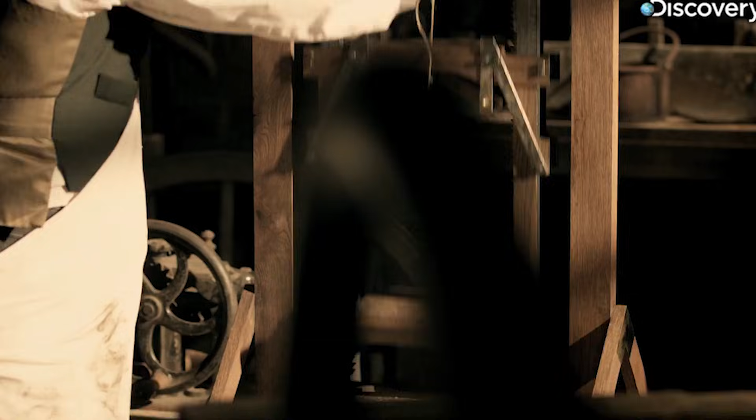May 23, 1854. Crystal Palace Exhibition Hall, Manhattan. The crowd of building developers and European-trained engineers gathered that afternoon would witness something that challenged everything they believed about vertical construction safety. Above them, a Vermont mechanic named Elisha Otis stood on a wooden platform, suspended 18 feet in the air by nothing more than hemp rope.

In New York's financial district, no building rose above 5 stories. Not because of engineering limits, but human ones. Deadly rope failures killed workers every month when industrial hoists snapped without warning. European engineering wisdom declared it impossible to build safely beyond 75 feet. American developers refused to risk their investments on unproven mechanical contraptions. The established truth seemed unshakable. Hemp rope breaks, people die, buildings stay low.

But Otis had designed something different, a spring-loaded safety mechanism that European experts dismissed as unreliable American novelty work. As hundreds of skeptical eyes watched from below, Otis raised his hand and gave the signal. His assistant lifted the axe. The rope that held him suspended above the crowd was about to be cut. What happened next would either prove the doubters right or change Manhattan's skyline forever.

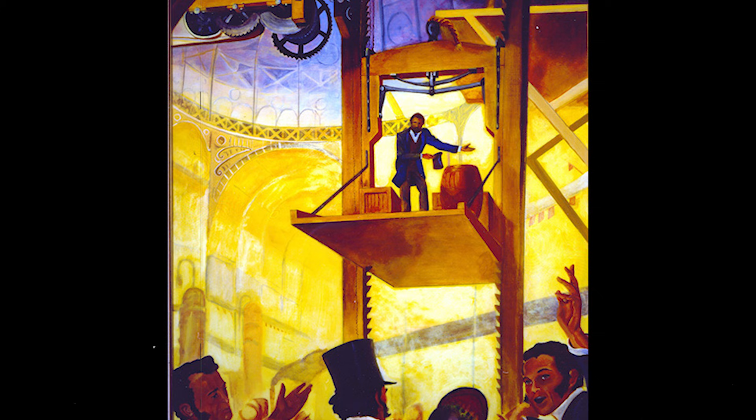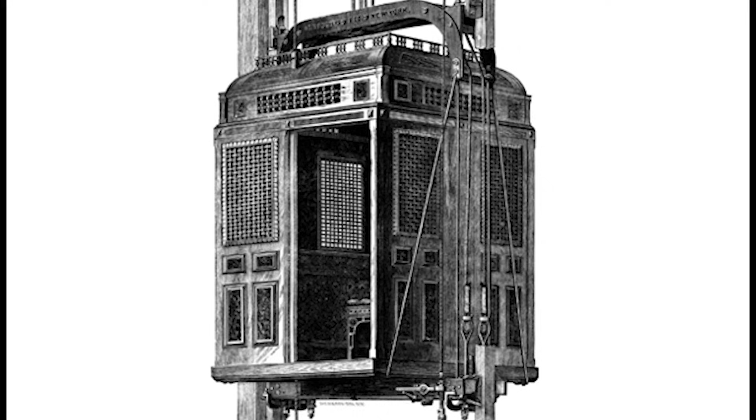The morning fog still clung to Manhattan's cobblestone streets in September 1852 when the construction foreman at the New Merchants Exchange building made his daily calculation. 5 stories, 75 feet from sidewalk to roofline. Beyond that height, he knew from bitter experience, the mathematics of human nature defeated the ambitions of architects. The upper floors of any building taller than 5 stories rented for half the price of ground-level space, not because of structural limitations, but because New York's business class refused to climb more than 75 stairs twice daily.

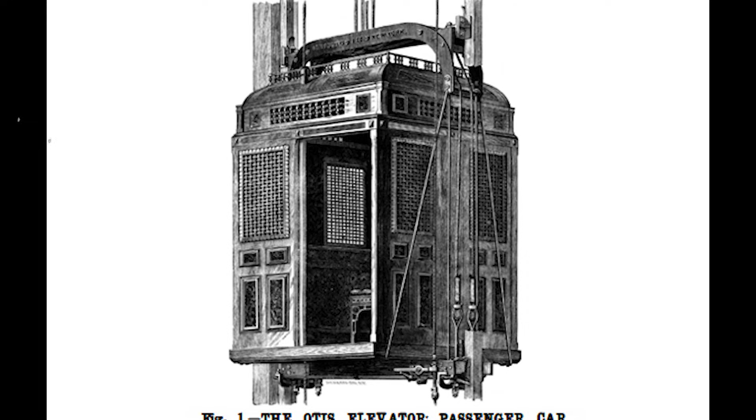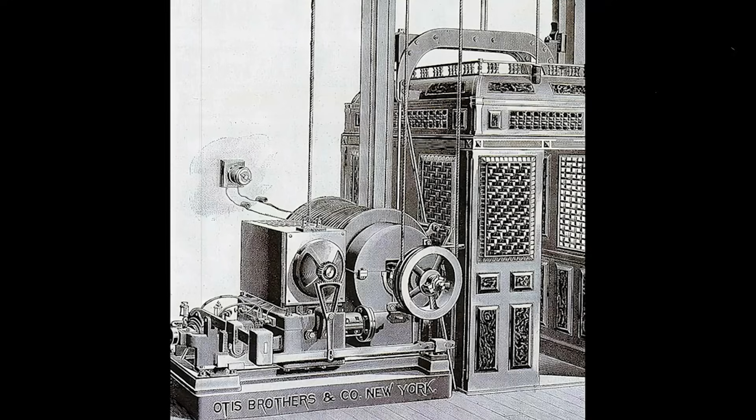The established wisdom ran deeper than mere convenience. European-trained engineers who had emigrated to New York's booming construction industry carried with them decades of calculated certainty about the vertical limits of commercial architecture. Johann Rapp, the Prussian-educated structural engineer overseeing the Exchange project, had studied under masters in Berlin who could recite the weight-bearing capacity of every known building material. Their conclusions were mathematically precise.

Beyond 5 stories, the economic equation collapsed. Rental income per square foot dropped by 50% while construction costs per floor increased by 30% due to the additional structural support required for height.

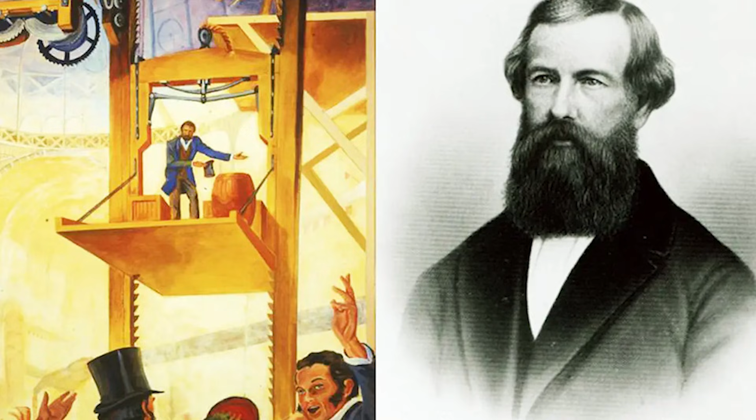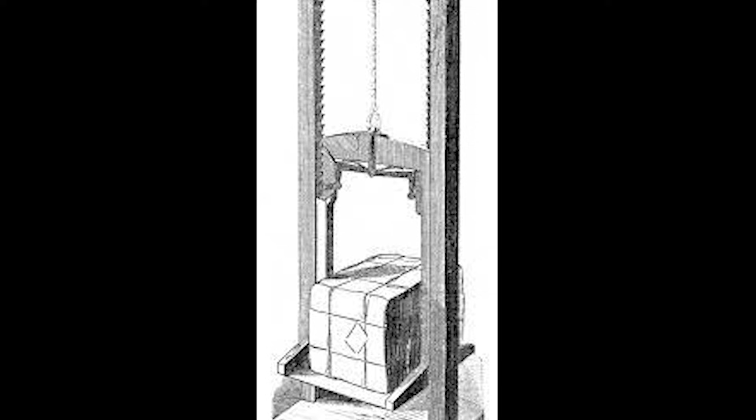The deadly reality behind these calculations lived in the industrial hoists that already served New York's warehouses and factories. Every construction site, every furniture manufacturer, every textile mill relied on rope and pulley systems to move heavy cargo between floors. Hemp rope, twisted from manila fiber and rated for specific weight loads, connected wooden platforms to steam-powered winches or manual capstans operated by teams of workers. The system functioned adequately for freight, but carried an accepted mortality rate that no responsible building owner would impose on paying tenants.

2 weeks earlier, the morning newspapers had reported another routine industrial death at the Haughwout Brothers Furniture Factory in Yonkers. The freight hoist's 3-inch hemp cable had parted without warning while carrying a load of mahogany bed frame components to the 3rd floor. The platform crashed down the shaft, killing both workers who had been guiding the cargo. The factory owner expressed appropriate regret and resumed operations the following day with a replacement rope rated for higher tensile strength. Such incidents occurred monthly throughout the Hudson River Industrial Corridor.

Hemp rope, regardless of diameter or fiber quality, eventually deteriorated under repeated stress loading. The breaking point was a matter of physics, not opinion.

Into this environment of calculated limitations stepped Elisha Graves Otis, a 41-year-old master mechanic whose entire professional life had been spent solving problems that other men accepted as permanent conditions. Born on a hardscrabble Vermont farm where broken equipment meant failed harvests, Otis had developed the engineer's fundamental mindset. Every mechanical system could be improved if you understood its failure points clearly enough. His formal education had ended at age 15, but 3 decades of repairing sawmill machinery, flour mill gear trains, and textile mill power transmission systems had taught him to see mechanical problems as puzzles waiting for systematic solutions.

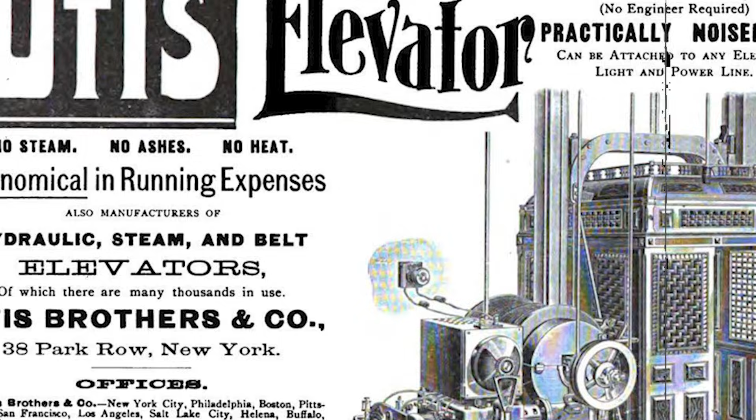Otis spent 3 weeks studying the mechanical principles behind rope failure before beginning his design work. Hemp fiber stretched under load, creating microscopic tears that accumulated over thousands of lifting cycles.

No visual inspection could detect the internal damage until the moment of catastrophic failure. The solution, Otis realized, required abandoning the assumption that rope strength was the critical safety factor. Instead, he would design a system that could function safely even after total rope failure.

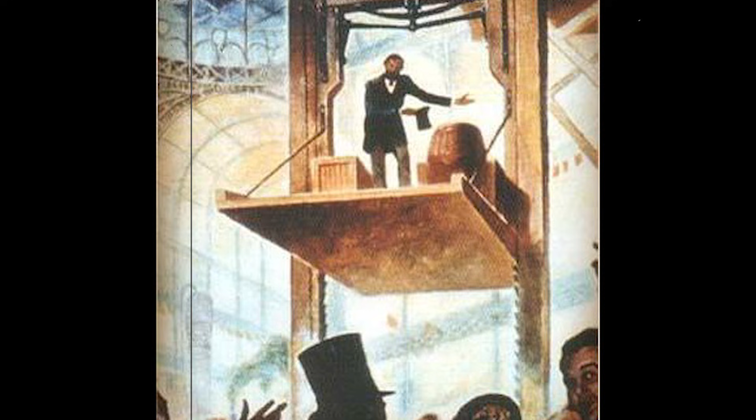The breakthrough concept emerged from his experience with railroad brake systems. Spring-loaded mechanisms could engage automatically when tension decreased beyond a predetermined threshold. Otis designed a tough steel wagon spring mechanism connected to spring-loaded pawls positioned alongside ratcheted guide rails. Under normal operation, rope tension kept the pawls retracted, allowing the platform to move freely up and down the shaft. If the rope broke, the sudden loss of tension would release the spring-loaded pawls, which would immediately wedge into the ratcheted rails and stop the platform's descent within inches.

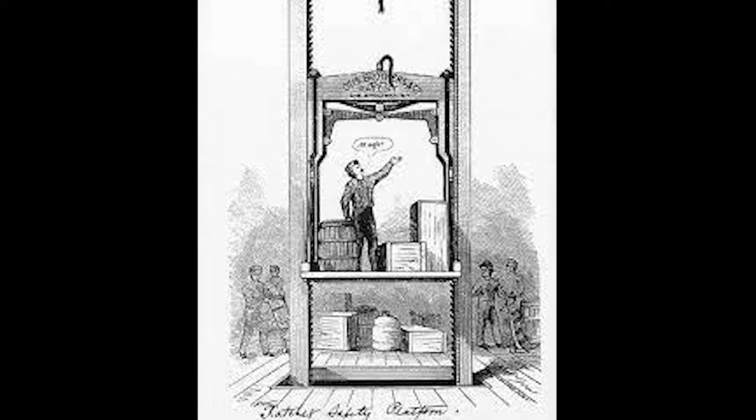The engineering specifications were precise and practical. Two U-shaped wagon springs, each rated for 2,000 pounds of tension load, connected through a lever system to spring-loaded pawls machined from tool steel. The guide rails featured 1-inch ratchet teeth cut at 45-degree angles into seasoned oak timber. The entire safety mechanism added exactly 18 pounds to the platform's weight and cost $100 to manufacture - double the price of a standard rope hoist, but a fraction of the cost of a single worker's death.

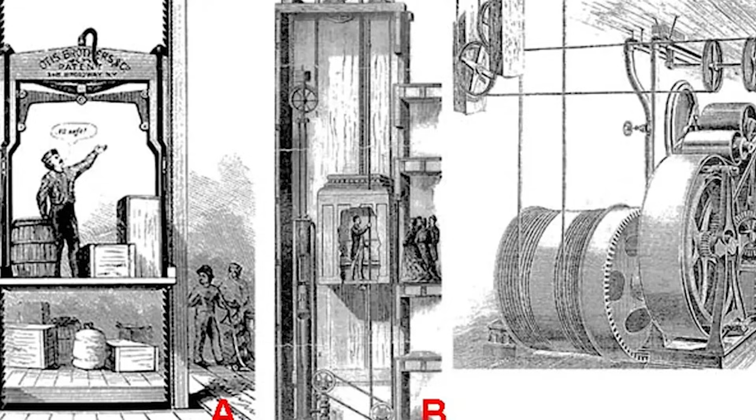By November 1852, Otis had installed his first safety hoist at the Maize & Burns factory. The device lifted 800-pound loads smoothly and quietly, with the safety mechanism completely invisible during normal operation. Factory workers, initially suspicious of any new machinery, quickly gained confidence as the system demonstrated its reliability through hundreds of lifting cycles without incident. Word of Otis's innovation spread through Yonkers' industrial community, but the initial market response proved disappointing.

Local factory owners praised the mechanical ingenuity while questioning the economic necessity. Standard hoists had served manufacturing adequately for decades. The occasional rope failure, while regrettable, represented an acceptable cost of industrial operations. Spending twice the price for an unproven safety mechanism seemed like unnecessary expense for a problem that claimed only 2 or 3 lives annually throughout the entire Hudson River corridor.

By September 1853, exactly one year after beginning his design work, Otis had completed and installed his first commercial safety elevator at the Crystal Palace Exhibition Planning Office in Manhattan. The installation demonstrated flawless mechanical performance, but generated zero sales inquiries from the thousands of visitors who observed the system during the exhibition's planning phase.

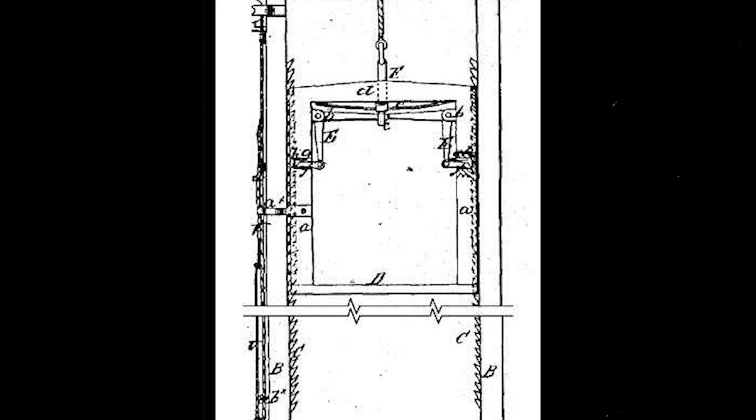New York developers dismissed the safety brake as mechanical trickery with no practical application to commercial construction. European-trained engineers published critical assessments describing the spring mechanism as unreliable American novelty work that violated established principles of mechanical engineering. The crushing reality of market rejection settled over Otis's workshop by early 1854, despite live demonstrations that proved the safety mechanism's effectiveness.

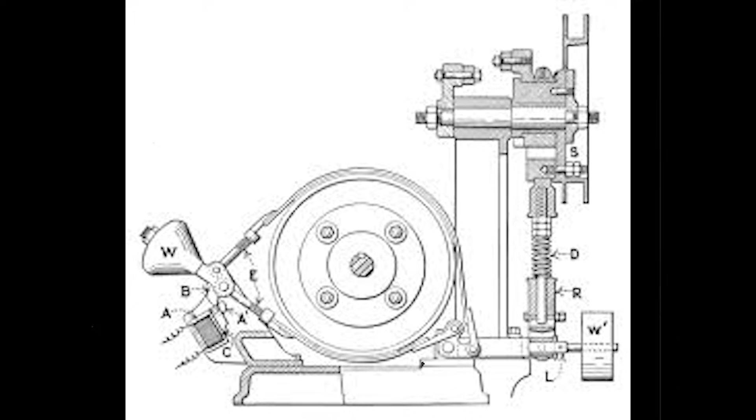Orders remained virtually non-existent. He had sold exactly 8 elevators, all for freight applications, none designed for human passengers. The vertical city of his imagination remained locked behind 5-story limitations, not because the technology was impossible, but because human psychology refused to trust American innovation over European engineering orthodoxy.

The financial crisis facing the Crystal Palace exhibition in early 1854 demanded theatrical solutions that conventional business wisdom could not provide. Phineas Taylor Barnum, newly appointed president of the Crystal Palace Association, inherited an enterprise bleeding money at a rate that would bankrupt the entire operation within 6 months. Daily attendance averaged fewer than 3,000 visitors, while the building's massive operating costs required at least 8,000 paying customers to break even.

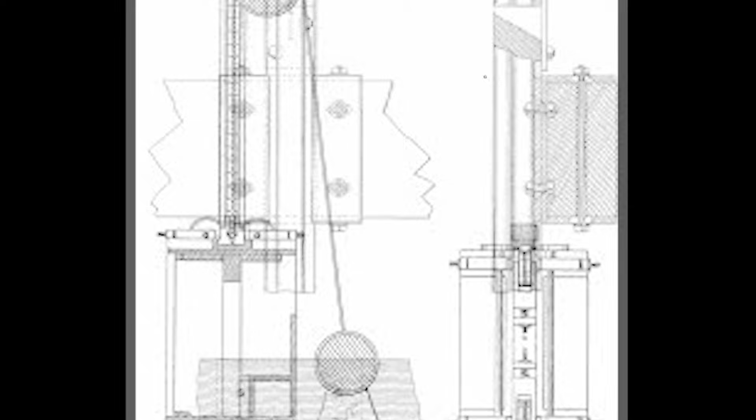European industrial exhibitions drew crowds through displays of established manufacturing prowess, but American audiences demanded spectacle, drama, and the promise of witnessing something genuinely unprecedented. Barnum understood that technical demonstrations succeeded or failed based on their ability to capture public imagination rather than engineering precision. His decades of experience managing circuses, museums, and traveling shows had taught him that crowds responded to moments of visible danger followed by dramatic resolution.

The key was creating genuine suspense about whether the performer would survive the demonstration, then delivering safety in a manner so conclusive that audiences would remember and retell the experience for years afterward.

The meeting between Barnum and Otis occurred in March 1854 at the Crystal Palace planning offices, where the inventor's safety hoist operated daily without attracting significant attention from visitors. Barnum observed the mechanism during routine cargo operations and immediately recognized its theatrical potential. The concept of a man deliberately severing his own life support system, then trusting an untested mechanical device to prevent his death, contained all the elements of compelling public spectacle.

More importantly, the demonstration would showcase American mechanical innovation in direct competition with European engineering traditions, creating a patriotic narrative that could draw crowds regardless of their technical understanding.

The practical arrangements required substantial modifications to Otis's existing equipment. The exhibition demonstration demanded a platform large enough for Otis to stand comfortably while remaining visible to spectators positioned throughout the Crystal Palace's main hall. The mechanism also needed to function reliably under theatrical conditions, where lighting, crowd noise, and performance pressure could affect the operator's precision. Barnum allocated prime exhibition space near the building's central dome, where natural lighting would illuminate the demonstration clearly and acoustic conditions would carry Otis's voice throughout the hall.

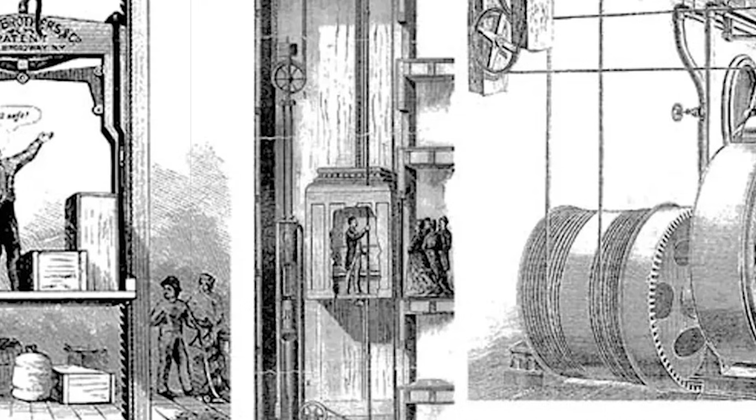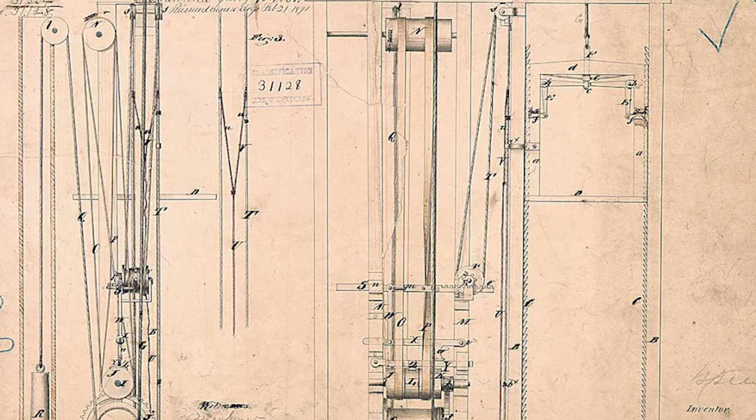The guide rails were machined from seasoned white oak and featured precisely cut ratchet teeth spaced at 1-inch intervals to ensure consistent engagement with the spring-loaded pawls. The safety mechanism itself required no modifications from Otis's standard industrial design, but the demonstration setup needed additional engineering considerations. The suspension rope was positioned to snap cleanly when severed by an axe blow, eliminating any possibility of partial failure that might compromise the dramatic effect. The spring-loaded pawls were adjusted to engage within exactly 4 inches of rope failure, providing sufficient drop distance to demonstrate genuine free fall while minimizing the mechanical shock when the safety brake activated.

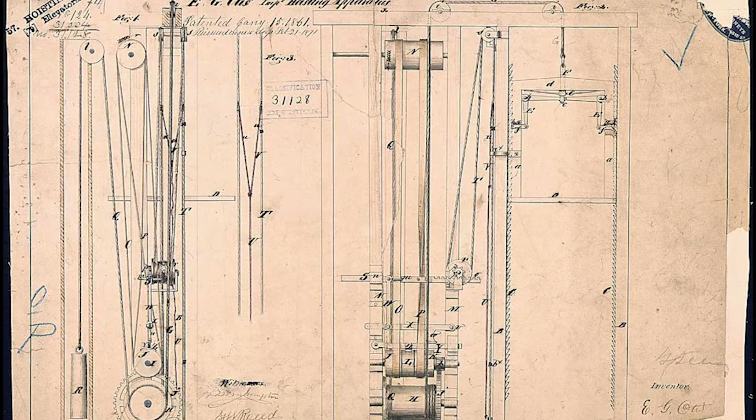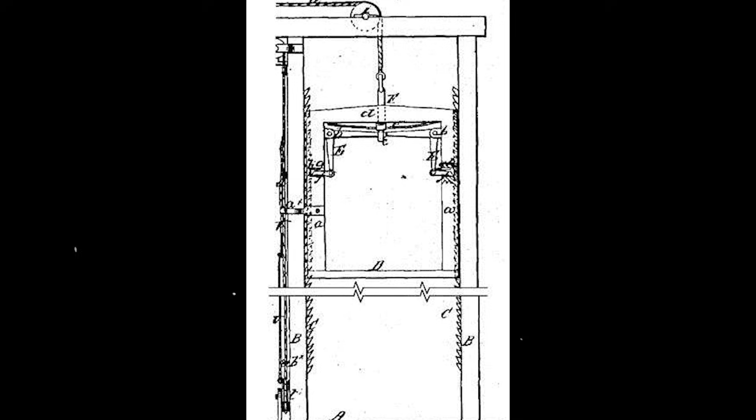The weeks preceding the demonstration generated considerable advance publicity through newspaper advertisements and word-of-mouth promotion among New York's business community. Barnum's promotional materials emphasized the life-or-death stakes of the performance, describing Otis as a daring American inventor who would risk his life to prove the superiority of Yankee mechanical ingenuity over European engineering traditions. The marketing campaign specifically targeted building developers, factory owners, and construction industry professionals, whose skepticism about elevator safety represented the primary obstacle to commercial adoption.

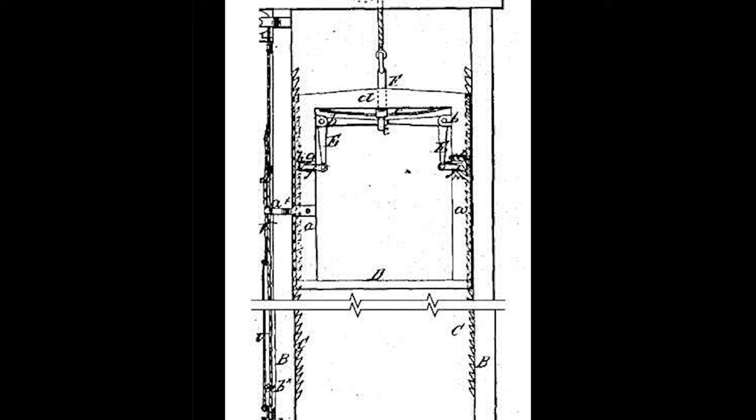Public interest exceeded Barnum's expectations as the demonstration date approached. Advance ticket sales indicated attendance would approach the Crystal Palace's maximum capacity of 12,000 visitors. Newspaper reporters from the Tribune, Herald, and Times requested exclusive interviews with Otis before the performance. Several European engineering consultants working on Manhattan construction projects announced their intention to attend, creating an international dimension to what had begun as a simple product demonstration.

The morning of May 23, 1854, arrived with unseasonably warm weather that filled the Crystal Palace's iron and glass structure with bright sunlight and oppressive humidity. Spectators began gathering around the demonstration area 3 hours before the scheduled performance, with the most prominent positions occupied by well-dressed building developers and formally attired European engineers who viewed the proceedings with obvious skepticism. Working-class factory owners and construction foremen filled the remaining space, their practical experience with industrial hoists providing them with intimate knowledge of exactly how catastrophic rope failures typically concluded.

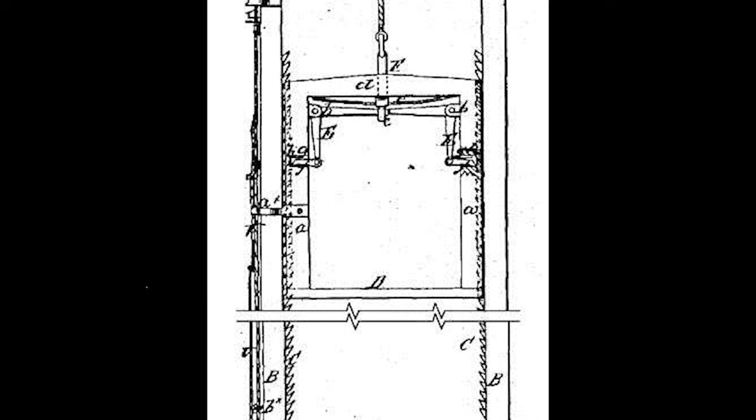Otis appeared at the demonstration site wearing his standard work clothes rather than theatrical costume, a deliberate choice that emphasized his identity as a practicing mechanic rather than a professional entertainer. His assistants had positioned the necessary tools and equipment with theatrical precision, including the sharp-bladed axe that would sever the suspension rope and trigger the safety mechanism.

The crowd's conversation gradually diminished as Otis began his ascent to the platform, the silence reflecting genuine uncertainty about whether they were about to witness a successful demonstration or a public death. The platform rose smoothly to its full 18-foot height, carrying Otis well above the heads of the assembled spectators. From that elevation, his voice carried clearly throughout the hall as he began explaining the mechanical principles behind his safety brake system. The technical details were deliberately simplified for the mixed audience, but he emphasized the fundamental engineering challenge, creating a mechanism that could prevent catastrophic failure even when the primary load-bearing component failed completely.

The demonstration reached its climactic moment when Otis raised his hand and called for silence throughout the hall. 12,000 spectators held their collective breath as his assistant positioned the axe blade against the hemp rope that represented the sole barrier between the inventor and a potentially fatal fall. The next few seconds would either validate years of engineering work and design refinement or destroy forever the credibility of American mechanical innovation in the elevator industry.

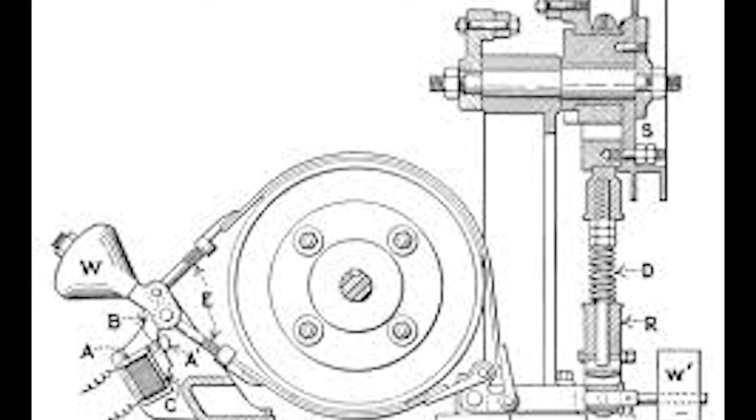The immediate aftermath of the Crystal Palace demonstration generated newspaper coverage that reached every major city from Boston to Charleston, but commercial orders arrived with frustrating deliberation. Throughout the remainder of 1854, Otis received inquiries from factory owners and warehouse operators who had witnessed the rope-cutting spectacle, yet most conversations concluded with polite expressions of interest rather than binding contracts. By December, total sales reached 8 elevators, generating revenue of $1,200 against manufacturing and demonstration costs exceeding $2,000. The gap between public acclaim and commercial adoption revealed the persistent divide between theatrical success and business confidence.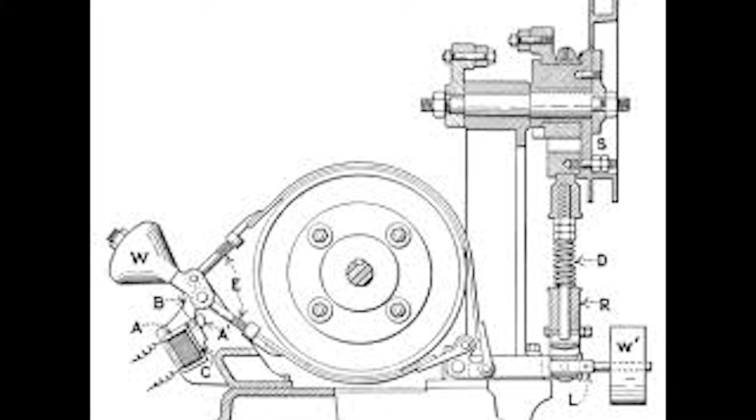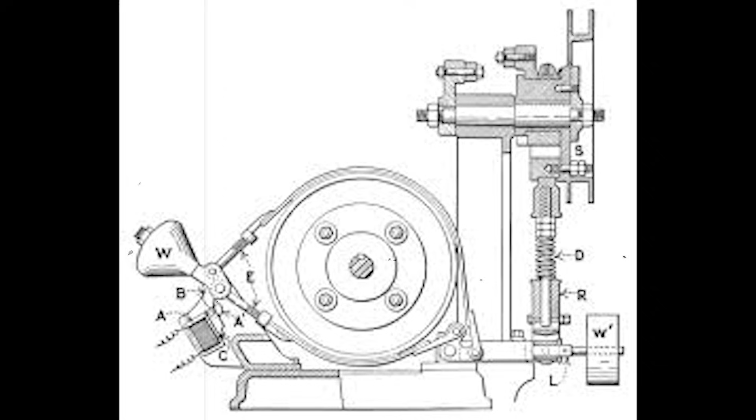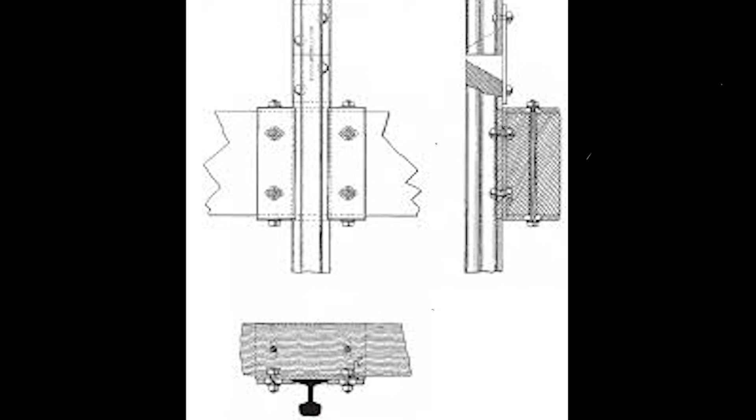The fundamental obstacle remained psychological rather than technical. Building developers and factory owners praised Otis's mechanical ingenuity while questioning whether the safety mechanism would function reliably under daily operational conditions. The Crystal Palace demonstration had proven the concept under controlled circumstances, but industrial applications involved thousands of lifting cycles, varying load weights, and operational stresses that could not be replicated in a single theatrical performance. European engineering consultants continued publishing technical critiques that questioned whether American spring steel could maintain consistent tension over extended periods of use.

Throughout 1855, Otis methodically addressed these concerns through incremental design improvements and expanded field testing. He installed demonstration elevators at 3 additional manufacturing facilities, accumulating operational data that documented mechanical performance across varying conditions. The results supported his engineering confidence. After 6 months of daily use, the safety mechanisms showed no signs of spring fatigue or pawl wear that would compromise their effectiveness. The ratcheted guide rails maintained precise engagement angles despite repeated activation cycles during routine maintenance testing.

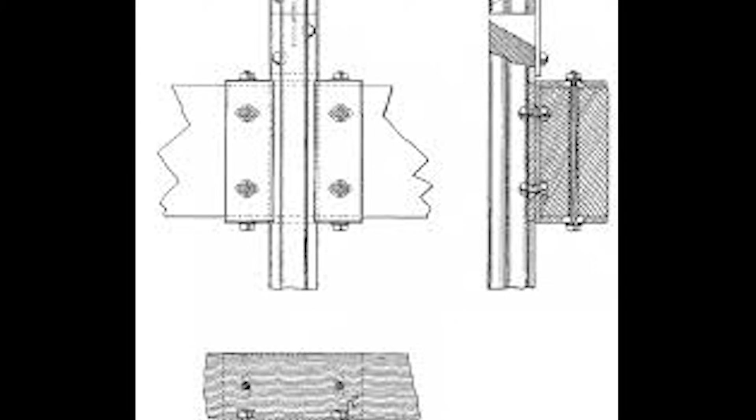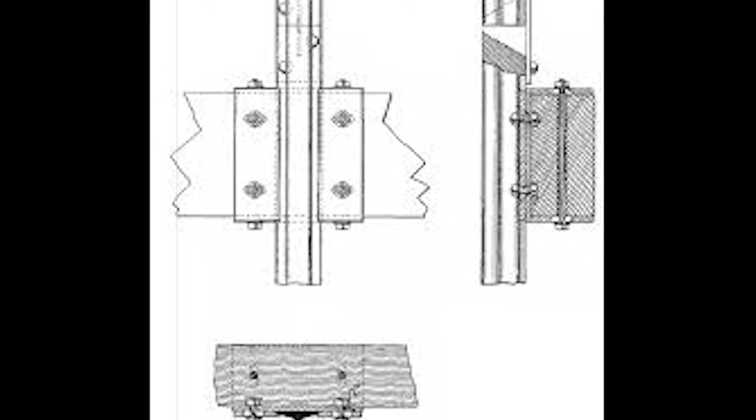The commercial breakthrough began with an unexpected inquiry from Eder Haughwout, owner of Manhattan's most prestigious china and glassware emporium on Broadway. Haughwout had observed the Crystal Palace demonstration with the calculating eye of a luxury retailer who understood that his wealthiest customers expected both elegance and convenience. His 5-story building at the corner of Broadway and Broome Street served clientele that included Mary Todd Lincoln, prominent banking families, and European diplomatic representatives who demanded the finest imported merchandise displayed in appropriately refined surroundings.

The challenge Haughwout presented transcended the industrial applications that had defined Otis's previous work. A passenger elevator serving luxury retail customers required engineering specifications that prioritized smooth operation, quiet performance, and absolute safety over the heavy lifting capacity needed for freight applications. The mechanism would carry well-dressed ladies in elaborate gowns, elderly gentlemen with walking sticks, and foreign visitors whose comfort and safety would directly impact the store's reputation among New York's social elite.

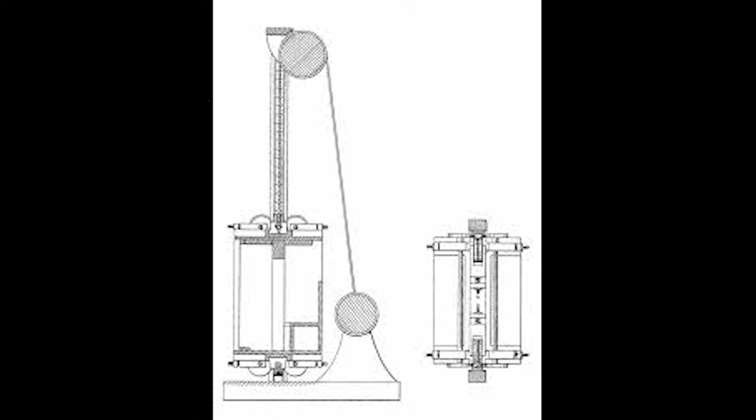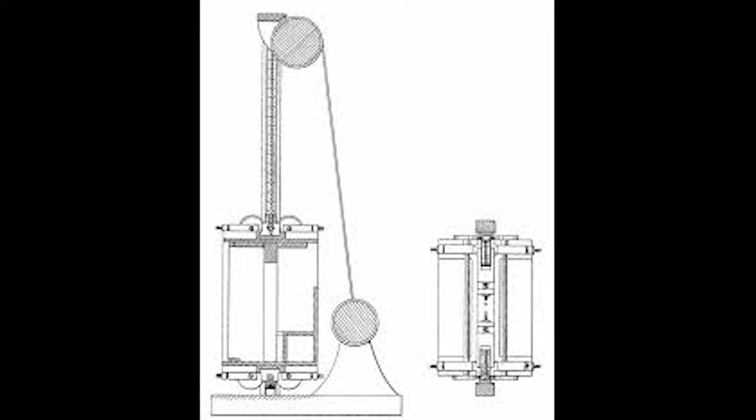Otis spent the winter months of 1856 developing passenger elevator specifications that addressed these refined requirements. The platform dimensions expanded to accommodate multiple passengers wearing the voluminous clothing styles of the period. The guide rail system was redesigned to eliminate the mechanical noise that characterized industrial hoists, incorporating felt padding and precision machining that reduced operational sound to levels appropriate for a luxury retail environment. The safety mechanism retained its core spring and pawl design while adding refinements that ensured smooth engagement without the jarring impact that freight elevators could tolerate.

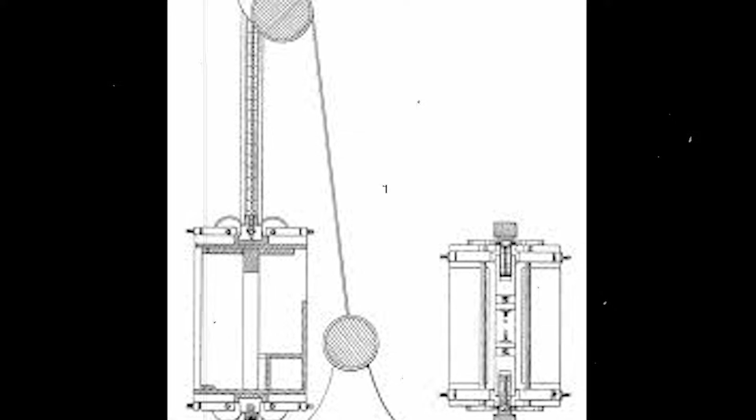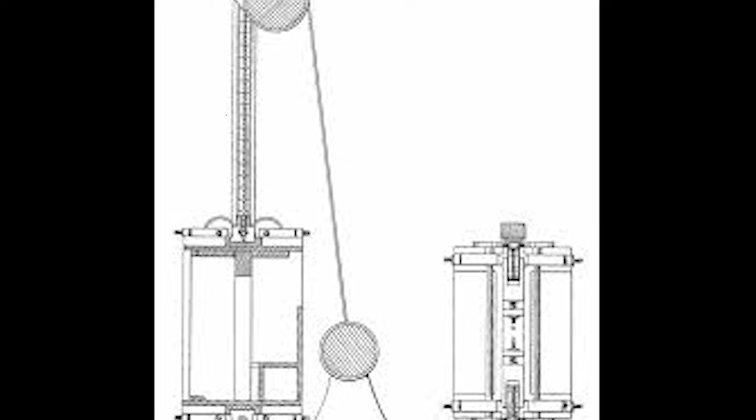The most significant innovation involved the power system. Industrial elevators relied on manual operation or steam engines that generated considerable noise and vibration. Haughwout's passenger application required a steam-powered hydraulic system that could provide smooth acceleration and deceleration while maintaining the quiet operation necessary for an elegant shopping experience. The hydraulic mechanism used steam pressure to drive a piston that lifted the elevator car through a system of pulleys and counterweights, with the safety brake serving as backup protection against cable failure.

Construction began in January 1857, with installation scheduled for completion before the spring shopping season. The engineering specifications reflected the luxury application. The elevator car featured upholstered seating for 6 passengers, polished brass fittings, and mahogany wood paneling that matched the store's interior decor. The operational parameters included a maximum ascent speed of 40 feet per minute, approximately 15 seconds travel time between floors, and a total capacity of 1,000 pounds, including passengers and operator.

The installation process attracted considerable attention from Manhattan's business community, as the Haughwout Building would house the world's first commercial passenger safety elevator. Skeptical observers gathered daily to watch construction progress, with particular attention focused on the safety mechanism installation. European engineering consultants published advanced critiques predicting that passengers would refuse to trust their lives to an untested American contraption, regardless of theatrical demonstrations or mechanical specifications.

March 23, 1857 marked the elevator's first operational day, with Haughwout personally conducting initial test rides before opening the system to customers. The New York Tribune reported the event with barely concealed amusement.

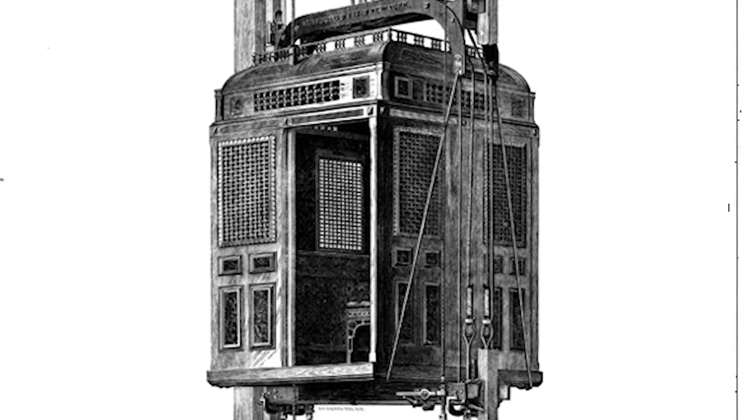Despite these obstacles, daily elevator usage gradually increased as customers gained confidence through repeated successful operations. The mechanism's smooth performance and obvious safety features slowly overcame initial reluctance, particularly among elderly customers who appreciated avoiding the physical exertion of climbing multiple flights of stairs while carrying purchases.

The elevator's novelty also attracted curious visitors who rode the system specifically to experience this unprecedented form of mechanical transportation. By summer 1857, the Haughwout elevator had achieved routine operational status, carrying dozens of passengers daily without incident.

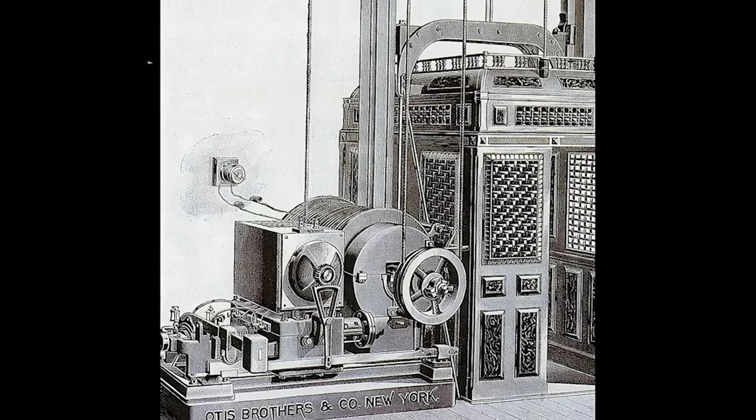The success generated inquiries from other luxury retailers and commercial building developers who recognized the competitive advantage that passenger elevators could provide in attracting customers and tenants. More importantly, the installation had proven that American elevator technology could function reliably in applications that demanded absolute safety and refined performance standards that exceeded industrial requirements.

The winter of 1860 to 1861 brought an unusually harsh diphtheria epidemic to the Hudson River Valley, claiming victims across all social classes with democratic ruthlessness. Elisha Otis, whose chronic health problems had plagued him throughout his adult life, contracted the disease in late March and died on April 8, 1861, at age 49.

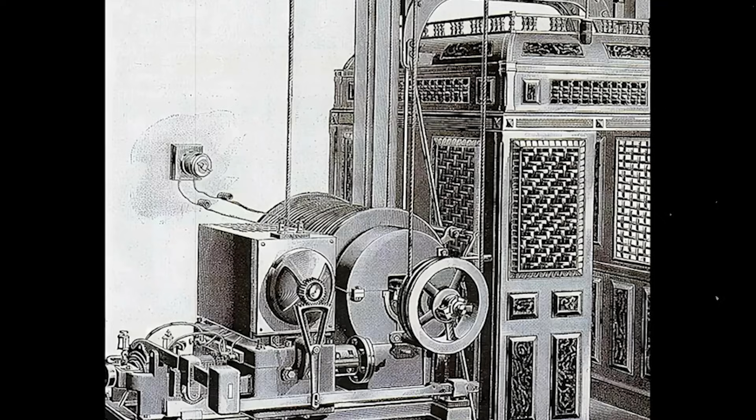His death occurred just 4 months after receiving patent number 31,128 for his safety brake mechanism, the legal recognition he had pursued for nearly a decade. The timing seemed cruelly ironic. Recognition arrived precisely when the inventor could no longer benefit from the commercial success that had eluded him for so long.

The Otis Elevator Company passed immediately to his two sons, Charles and Norton, who inherited an enterprise with 25 operational elevators scattered throughout Manhattan and Brooklyn, outstanding debts exceeding $3,000, and a manufacturing operation that employed fewer than a dozen workers. The brothers possessed business acumen that their father had lacked, but they faced immediate challenges that threatened to destroy the company before they could establish stable operations.

The outbreak of civil war in April 1861 disrupted construction activity throughout New York, as building developers postponed major projects indefinitely, and existing elevator customers questioned whether mechanical systems represented wise investments during uncertain economic times.

Charles Otis, the elder son at 26, had worked closely with his father during the final years, and understood both the technical principles behind elevator design and the commercial obstacles that had limited market acceptance. Norton, 5 years younger, brought systematic organizational skills that complemented his brother's mechanical knowledge.

Together, they recognized that sustaining their father's innovation required transforming a craftsman's workshop into a manufacturing business capable of producing standardized elevators at prices that could compete with European imports while maintaining the safety standards that distinguished American designs.

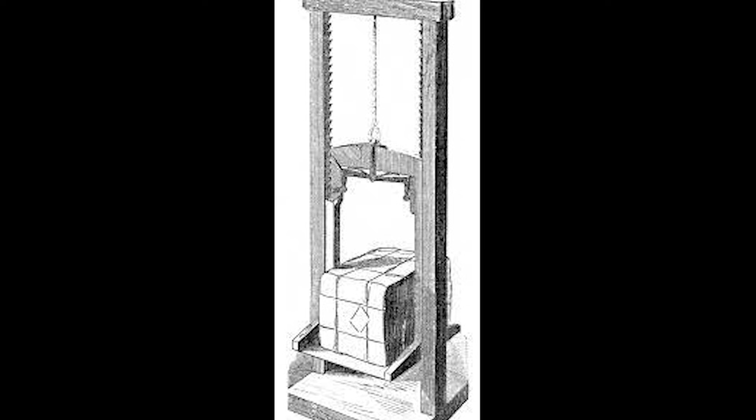Several competitors had entered the elevator market, offering cheaper systems that eliminated safety mechanisms in favor of lower prices and simpler installation requirements. European engineering firms established American offices and promoted traditional rope and pulley systems that claimed superior reliability through time-tested design principles rather than unproven mechanical innovations. The most serious challenge emerged from changing construction economics during the war years.

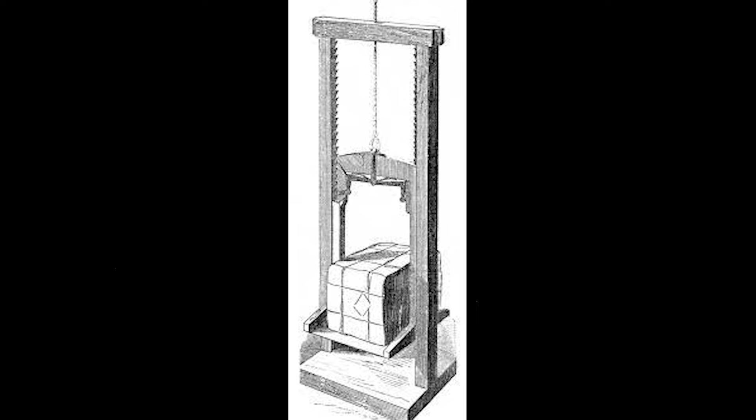Manhattan real estate prices, which had driven demand for vertical building solutions during the 1850s, stagnated as business activity shifted toward military contracts and war-related manufacturing. The economic incentive for constructing tall buildings disappeared when ground floor space could accommodate most commercial requirements at stable rental rates. Building developers who had previously considered elevator installations as competitive advantages now viewed them as unnecessary expenses that reduced profitability without providing corresponding benefits.

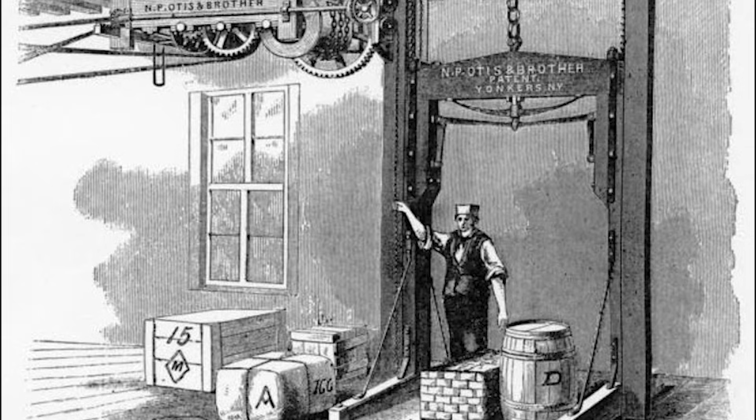The Panic of 1873 delivered the decisive blow to elevator market expansion that had been building throughout the post-war Reconstruction period. The financial collapse, triggered by railroad overspeculation and European investment withdrawals, created a depression that lasted until 1879 and virtually eliminated new construction activity throughout American cities. Manhattan building permits, which had averaged over 800 annually during the pre-war boom, fell to fewer than 200 per year during the worst Depression years.

The psychological impact of economic collapse extended the market contraction beyond rational financial calculations. Building developers who had survived the panic became extraordinarily risk-averse, avoiding any innovations that could not demonstrate immediate and substantial returns on investment. Elevator installations, which required significant upfront capital and ongoing maintenance costs, represented exactly the type of speculative expense that Depression-era business owners eliminated first.

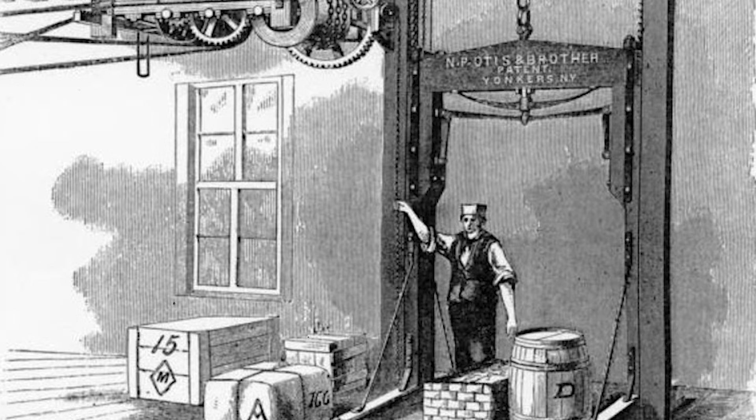The safety benefits that had gradually won acceptance during the 1860s seemed irrelevant when building heights remained limited to traditional five-story maximums that required no mechanical assistance for vertical transportation. Several prominent Manhattan buildings actually removed their elevators during the mid-1870s to reduce operational expenses and eliminate maintenance costs that could not be justified by rental income from upper floors.

The Tribune Building, Western Union Building, and Equitable Building stood as isolated exceptions to the five-story limitation. But even these structures faced financial pressures that questioned the economic viability of vertical construction in American cities.

European engineering publications seized upon the American elevator industry's struggles as validation of their long-standing skepticism about mechanical solutions to architectural challenges. Technical journals published detailed analyses proving that tall buildings could never achieve economic viability in American business conditions, citing operational costs, safety concerns, and tenant psychology as insurmountable obstacles to vertical urban development. The mechanical ingenuity that Americans had celebrated during the Crystal Palace demonstration now appeared as misguided innovation that violated fundamental principles of sound construction practice.

By 1875, only scattered tall buildings existed in Manhattan, and critics confidently declared the elevator a passing fancy, unsuited to American commercial requirements. The vertical city that Elisha Otis had envisioned seemed like an impossible dream, defeated not by technical limitations but by economic reality and human psychology. His sons maintained the company through custom installations and industrial applications, but the transformative potential of passenger elevators appeared permanently constrained by forces beyond mechanical engineering solutions.

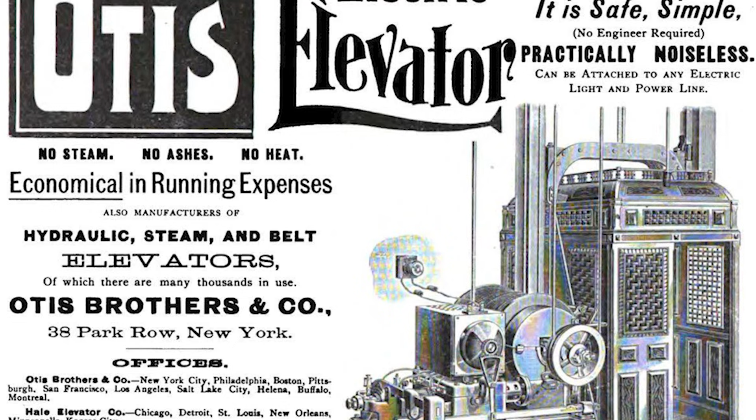Rather than purchasing additional expensive Manhattan real estate, Equitable's directors chose to add four floors to their existing building, creating the first 12-story office structure in American commercial history. The expansion required multiple passenger elevators capable of transporting hundreds of office workers daily between floors that extended far beyond the reasonable limits of stair-climbing convenience.

The engineering specifications for the Equitable installation represented the most ambitious elevator project yet attempted in American construction. Six passenger elevators, each with a capacity of 1,500 pounds, would serve 12 floors with travel speeds of 120 feet per minute, three times faster than the Haughwout store's pioneering system. The safety mechanisms incorporated all of Charles Otis's design refinements, including dual spring systems, reinforced guide rails with precision-cut ratchet teeth, and emergency stop controls activated by passengers in case of mechanical problems.

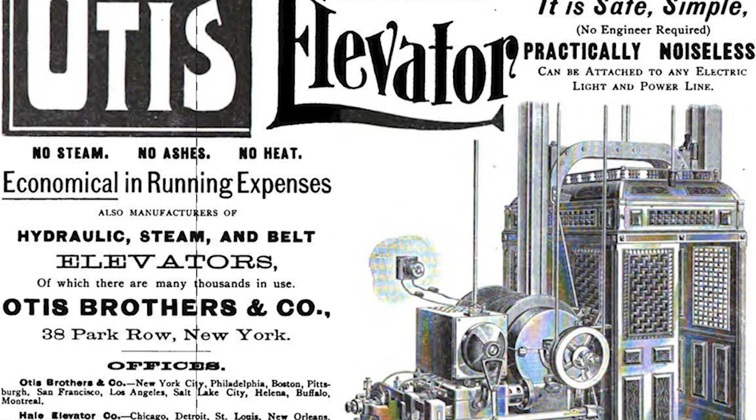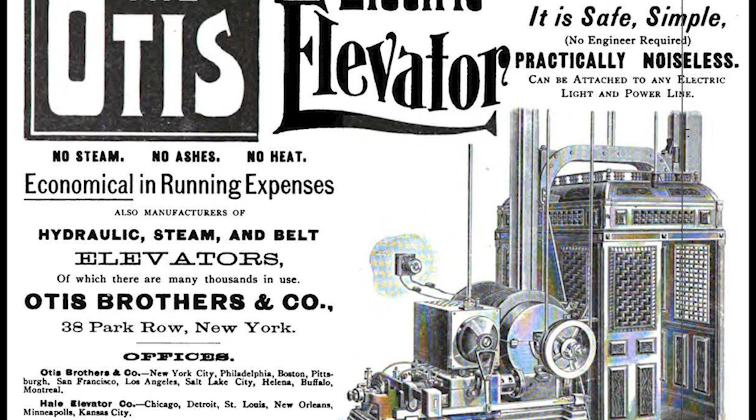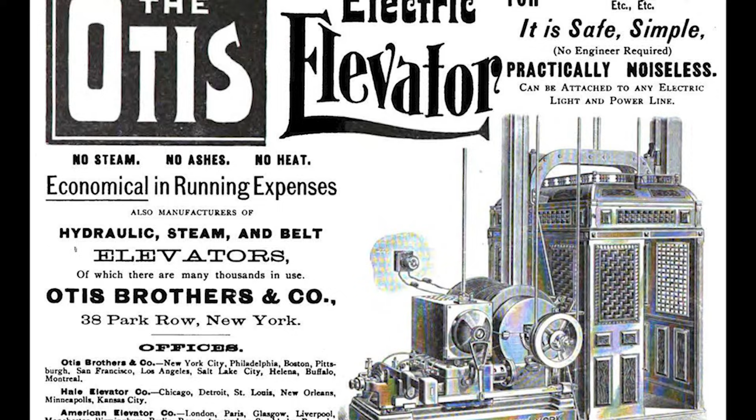The installation process required six months of construction work that attracted daily observation from Manhattan's architectural and engineering communities. European consultants who had confidently predicted the failure of American vertical construction during the Depression years now watched with grudging interest as Otis elevators demonstrated capabilities exceeding their theoretical calculations about passenger psychology and mechanical reliability. The smooth, quiet operation of the hydraulic drive systems eliminated most of the noise and vibration that had characterized earlier elevator designs, while the safety mechanisms provided visible reassurance that addressed lingering public concerns about rope failure.

The commercial success of the completed Equitable building exceeded all projections and fundamentally altered Manhattan real estate economics. Upper floors, which had traditionally rented for half the price of ground-level space, now commanded premium rates of $4 per square foot compared to $2.50 for street-level offices. The reasons were immediately apparent to tenants: better views of New York Harbor and the Hudson River, cleaner air above the dust and noise of street traffic, and greater privacy from the commercial bustle that characterized ground-floor spaces.

The psychological transformation of Manhattan's business community occurred with startling rapidity once the Equitable building proved the economic viability of vertical construction. Building developers who had avoided elevator installations for two decades suddenly competed to secure Otis contracts for new construction projects. The company's order backlog extended beyond their production capacity by early 1881, requiring expansion of manufacturing facilities and workforce to meet demand that had materialized seemingly overnight.

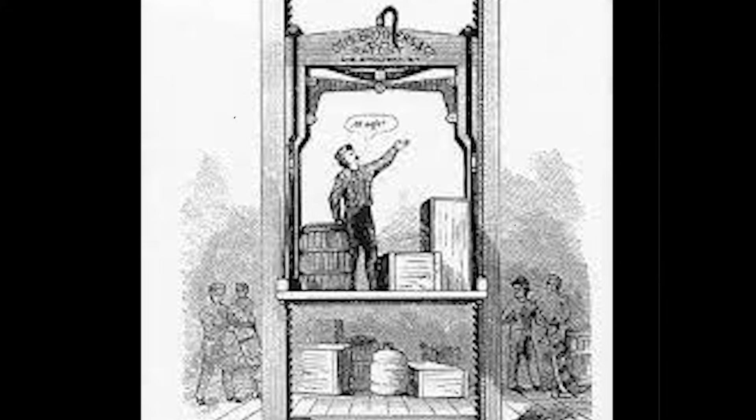The architectural implications extended far beyond individual building projects to encompass fundamental changes in Manhattan's urban landscape. Trinity Church, which had dominated the city's skyline at 280 feet since 1846, suddenly appeared dwarfed by the Tribune Building's 260 feet and the Western Union Building's 230 feet. The psychological impact was profound. For the first time in New York's history, commercial architecture challenged religious structures for visual prominence in the urban environment.

The engineering achievements that made these heights possible reflected continuous refinements to Otis's original safety brake concept. The spring-loaded pawl mechanism remained fundamentally unchanged, but manufacturing precision had improved dramatically through machine tools that could cut ratchet teeth to tolerances measured in thousandths of an inch. The guide rail systems now utilized steel rather than wood, providing greater durability and more consistent engagement with the safety mechanisms. Steam-powered hydraulic systems had been refined to deliver smooth acceleration and deceleration, eliminating the jarring movements that had characterized early elevator installations.

The market response to successful tall building operations generated a construction boom that transformed Manhattan's economy and established elevator installation as an essential component of commercial development. By 1883, over 2,000 Otis elevators operated in New York buildings alone, serving structures that ranged from modest six-story commercial buildings to 12-story office towers that housed hundreds of workers on upper floors that had been economically worthless two decades earlier. The social implications of vertical construction

extended beyond economics to encompass fundamental changes in urban work patterns and residential preferences. Office workers who had previously accepted five-story limitations as natural constraints now took for granted the ability to work on floors that provided commanding views of Manhattan's expanding commercial district. The elevator operator became a recognized profession with specific training requirements and salary scales reflecting the responsibility of safely transporting dozens of passengers daily.

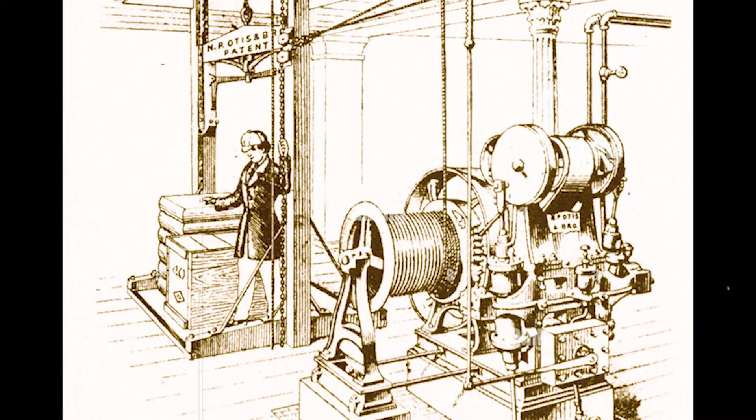The vindication of American engineering innovation proved particularly satisfying to the Otis brothers, who had endured years of European criticism and domestic skepticism about their father's mechanical solutions. European architectural publications that had dismissed safety brakes as unreliable American novelty work now published detailed technical analyses of Otis elevator systems, seeking to understand the engineering principles that had enabled vertical construction on a scale European cities had not attempted.

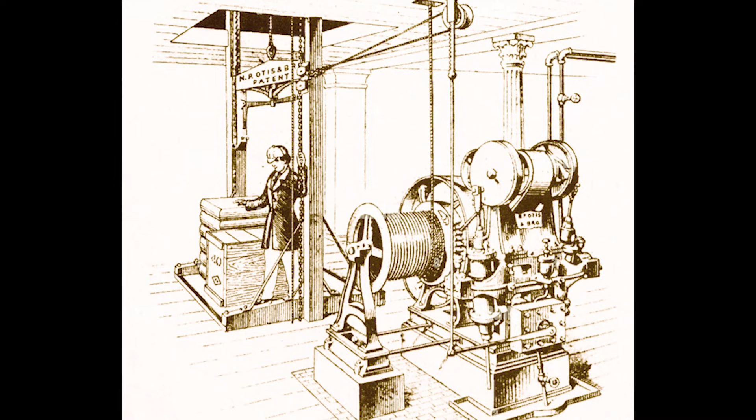The transformation from hemp rope limitations to steel-guided safety reached its symbolic conclusion in 1875 when the completed Tribune Building rose to 260 feet, definitively establishing that Manhattan's future lay not in horizontal expansion across expensive real estate, but in vertical development that maximized the economic potential of every square foot of urban land. What European experts had declared impossible, American determination and mechanical ingenuity had made inevitable, creating the foundation for the skyscraper age that would define urban architecture for the next century.